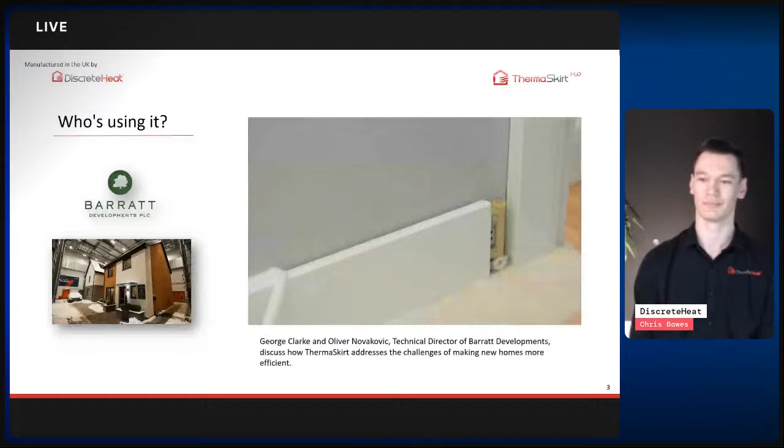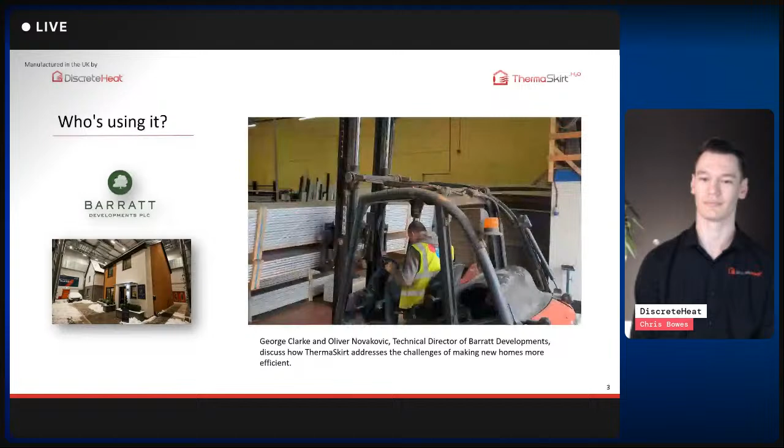So in the Z House I have, because I'm testing. But actually, in some of the other houses we're now trialing, we won't have radiators. We'll either have skirting board heating or underfloor heating. So multifunctional skirting board. Yeah. Love that. And what's great about it is that you can also put electric down it. So as you know, as we move further along the zero carbon agenda, we're going to really concentrate on fabric. So the skirting board's a bit like ductwork for running services. Yeah. So as you know, in offices, we've regularly ran electrics down the service. Here, we're running hot water in the skirting board.

There's some great stories. So, as Oliver mentioned, we are going to have to look at being more efficient with our heating systems. So how Barratt's will do this with their new build properties is they're going to be using heat pumps designed at low flow temperature, as the houses will be heavily insulated. However, you can be very efficient with your heating system too on a gas boiler.

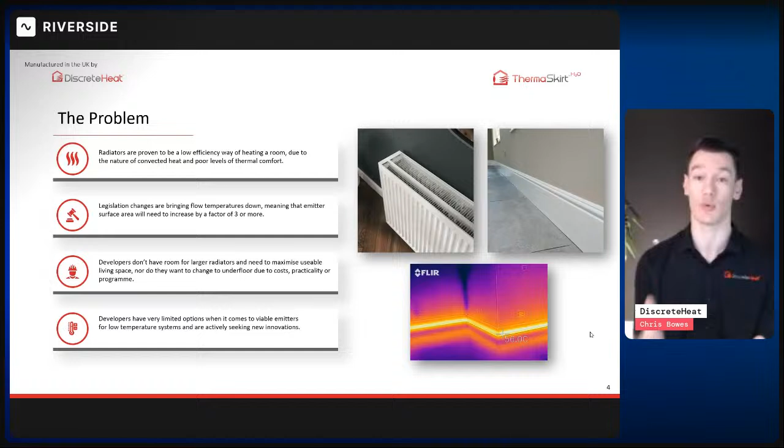What you will have to do is obviously reduce your flow temperature to around 60, 55 degrees. Now, with this reduction in flow temperature, you are going to have to increase the size of your emitters. So with radiators, you will be looking at using either double or triple panel radiators in order to be more efficient. Alternatively, increasing massively the width of the radiator itself.

Now, developers and our 80,000 customers over the last 15 years really found radiators repulsive and not really suitable for their property. So that's why they continue to use us and offer options on developments, and customers continue to come back to us for a more practical, space-saving, efficient heating.

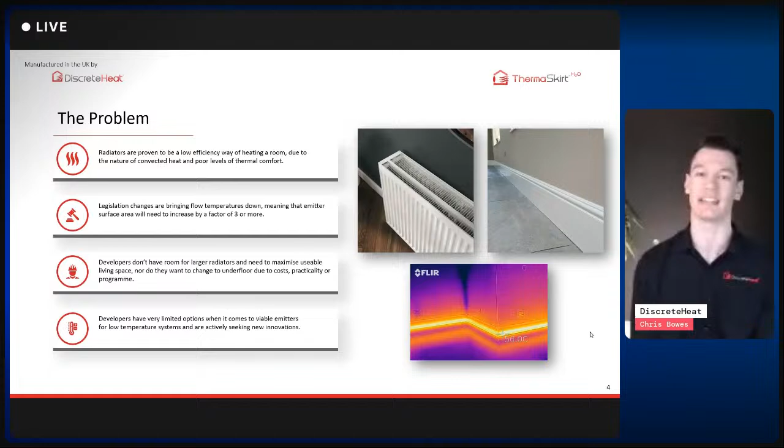Now, to really picture the size of the radiator versus the equivalent length of skirting, I've got a table here that shows you a double panel radiator, the output at delta T20, which is a heat pump flow temperature, and then the equivalent length of Deco BM2, or 2-pipe system, and the equivalent length of Deco BM3, or 3-pipe system. And as it's taller and has more surface area, the 3-pipe delivers more heat into the room.

Now, if you had a room that was around 500 watts heat loss, and you tried to heat it with a radiator on a heat pump, you would need a double panel 1 meter long radiator to meet the heat loads of that particular room. Alternatively, if you were using the 2-pipe profile, you would only need 11.7 meters of available wall space. And with the 3-pipe, you would only need 7.5 meters of available wall space, so even less.

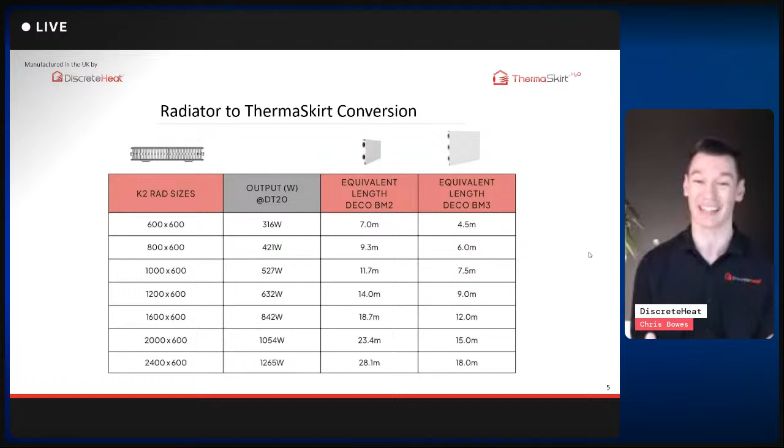So essentially, ThermaSkirt eliminates the aesthetic and practical compromises involved with radiators, as you're removing the need for a big bulky metal box on your wall, and you just use the skirting that you've already got, but that will be delivering the heat.

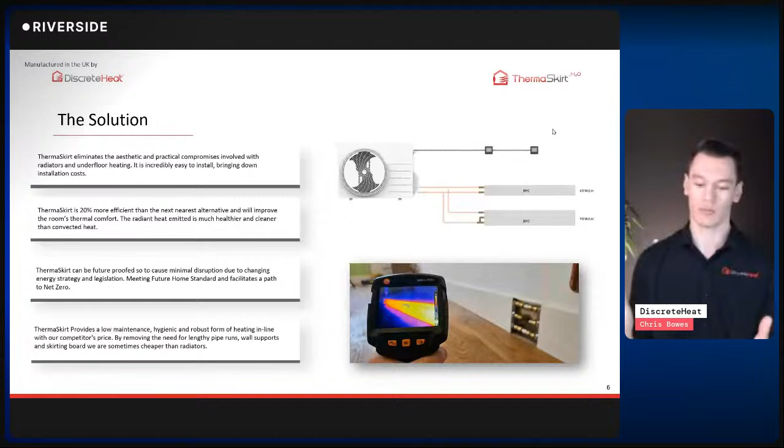Now, really how you should be using your boiler, if you've got one, is by reducing it to condensing temperature, as that's how they're really rated. What our customers have been doing is designing at those lower temperatures, 50, 55 degrees, and they've been finding that ThermaSkirt is around 20% more efficient than the nearest alternative and improves the room's thermal comfort.

Some of our customers have been taking it one step further and actually getting heat pump ready and designing at 45 degrees flow temperature on a boiler. This means they can remove their radiators, get the pipework ready, install their ThermaSkirt, and whenever they're ready to remove their boiler and switch the heat pump in, they can do so whenever they please. So it's a lot less disruption getting heat pump ready using ThermaSkirt, and a great interim solution.

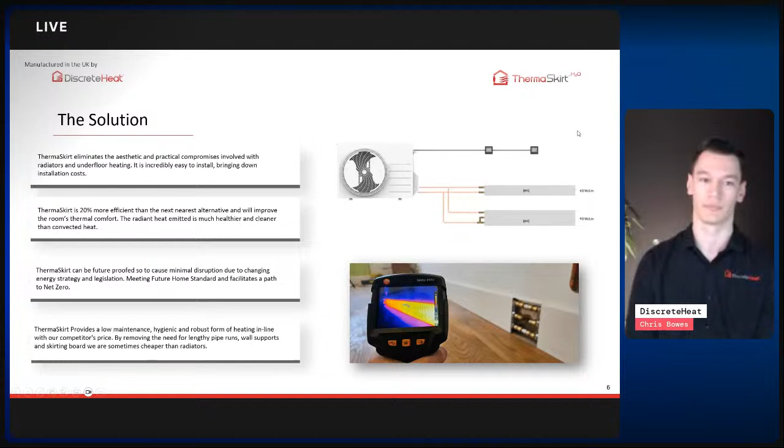So how does ThermaSkirt actually work? We've got here a cylinder that's powered by a heat pump with the 22mm flow and return going around the house. Then we're teeing off into 15mm copper or plastic into the ThermaSkirt, similar to what you would do for a radiator. The hot water is going into the ThermaSkirt, and the heat is being transmitted into the room via radiant heat. You can control ThermaSkirt either by a manual dial like a TRV but at skirting level, or you can use digital controls similar to underfloor heating, like a manifold system.

Not only have you got the flexibility with controls, but you can design all the way from 35 degrees up to 70. That's flow temperature, so it's the perfect partner for heat pumps. You can use it on a boiler, you can use it at really low flow temperatures, and it's a great interim solution if you are looking to be more efficient.

The reason why ThermaSkirt is more efficient is due to the fact it's made of aluminium. Aluminium is a great emitter of heat. It's quick to heat up and quick to cool down. And as it's squashed and stretched all around the room, it's essentially one giant 360-degree radiator.

Now, as it's radiant heat, rather than convection heat like a radiator heats the room, you have comfort similar to underfloor heating. So you've got all the ease of install of a radiator and the fast responsiveness, but you have the nice even heat distribution all around the room, similar to what you would get with underfloor.

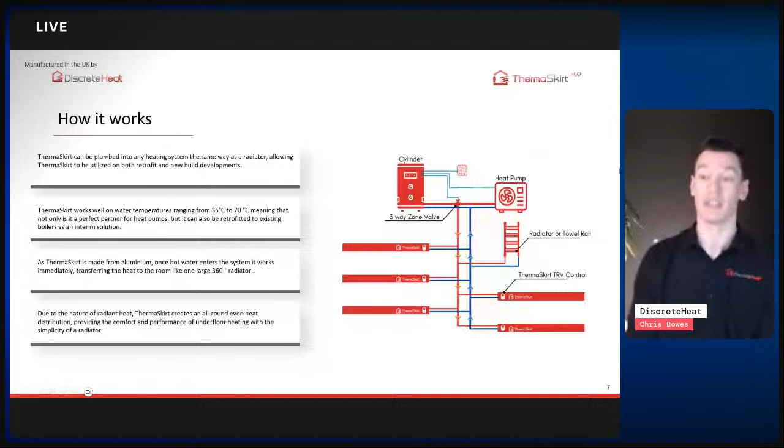So this has been proven by an independent company called BSRIA. So they had a test with 2 rooms, 4 by 4 meters, as you can see on the screen here. Now, to the left, you've got 800 watts delivered by convected heat by the radiators. And then to the right, you've got 800 watts delivered by radiant heat, which was with ThermaSkirt.

Now, if we look at the radiator graph, we've got 22 degrees by the radiator itself. And as you move further and further away from, obviously, the hottest point of the room to the coldest, you're looking at a differential of 4.8 degrees, which is quite substantial considering you can probably detect that quite easily and be quite cold on the extremities of the room. Now, with ThermaSkirt, you only have a differential of between 1.8 degrees and 1.9, which obviously is significantly more comfortable.

Now, from this test data, not only did BSRIA find that we are 13% more efficient than radiators like for like, but you will be more comfortable in the room due to the fact that it will be the same temperature throughout. Now, radiators have to work extra hard on heat pumps or increase by a factor of around 3 in order to meet the heat loads at low flow temperatures, which is quite unappealing and creates a barrier for our step to net zero with our heating systems.

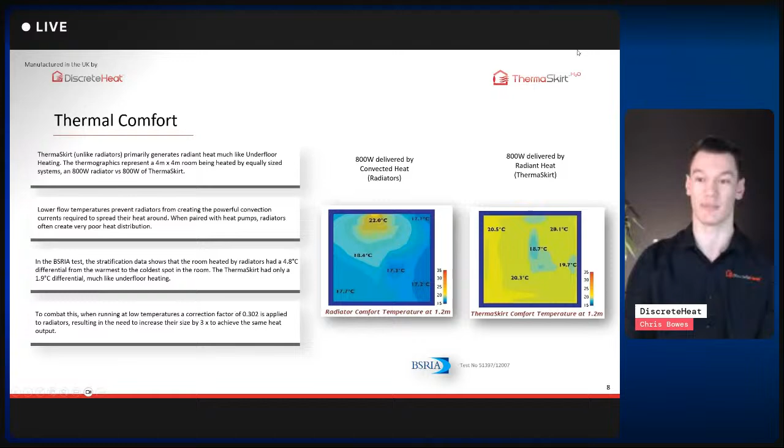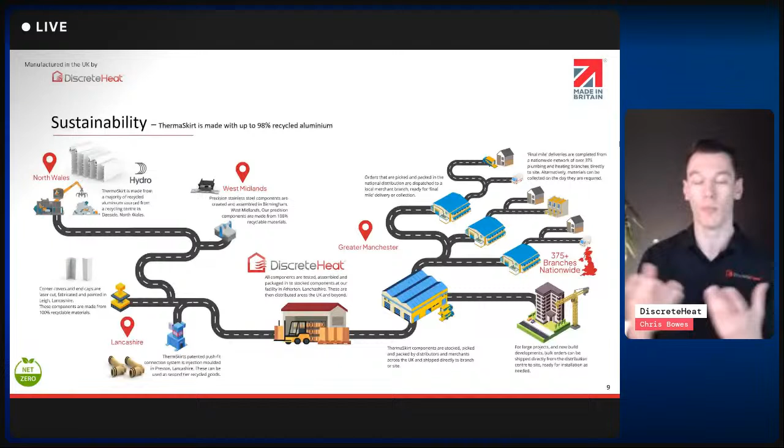So not only are we thinking about being an efficient heating system, but we reflect as a company on how we're going to be sustainable. So this might mean a lot to yourselves, and we all need to think of how we can go more green as a company.

So this is a graph of how ThermaSkirt goes from just pure aluminium to installed at the end in someone's home working as a heating system. So it starts off with a company called Hydro in North Wales. They extrude the aluminium and get it all ready with 98% recycled aluminium and send it over to our factory here in Atherton. Now we get other parts from the West Midlands, Lancashire, covers, corners, connections, which we all assemble, box up, test and get all ready to go.

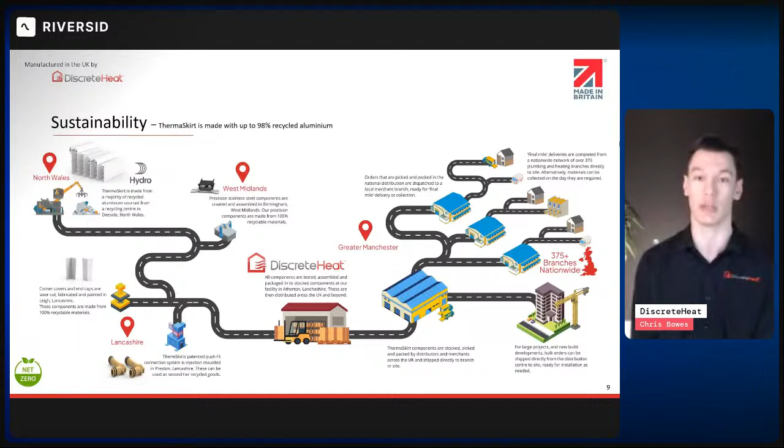Now they get sent to merchants such as City Plumbing, who then send it onto smaller branches onto the homeowner, or they will send it directly to site if it's a large project, like a large block of apartments. One thing to also note is that all of our parts that we get in Discrete Heat are 100% manufactured within the UK. So we are trying to think of the future and our steps towards getting to net zero as a company.

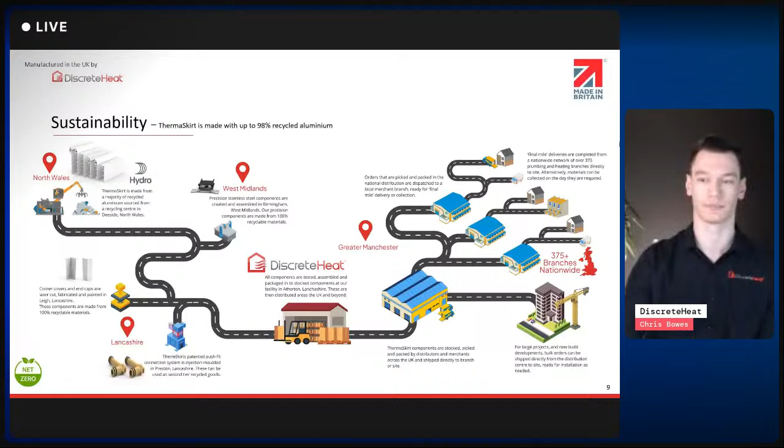Obviously ThermaSkirt is very efficient, it works well. We have lots of people that use us, but what are some real life examples? And this is a great one. So this was a gentleman named Nigel. He had a 17th century cottage powered by an oil boiler. So he was really struggling with radiators as he had high heat losses, very glazed and high heat loss areas.

So radiators would have to be absolutely everywhere. It looked like a radiator warehouse, and underfloor heating would have been very tricky to install with lifting the flooring and the retrofit program. So he found ThermaSkirt and was very impressed. So essentially how we designed it was the 3-pipe for the ground floor, so high heat loss areas where you're spending most of your time, and the 2-pipe on the first floor, with bedrooms that have less heat demand. All of these rooms were plumbed back to a manifold with individual room thermostats that were Wi-Fi enabled.

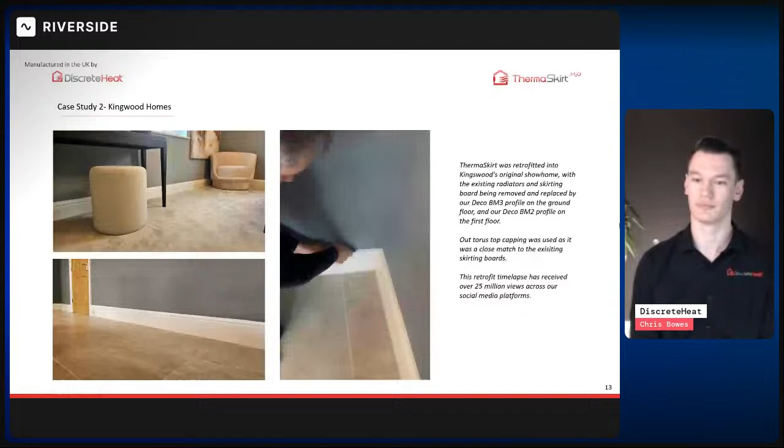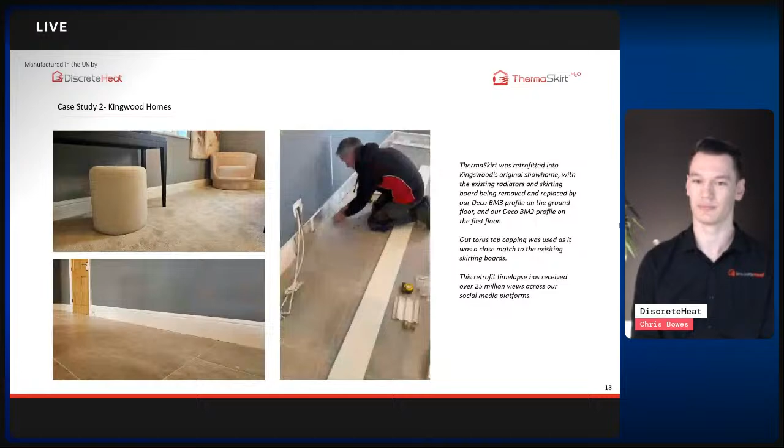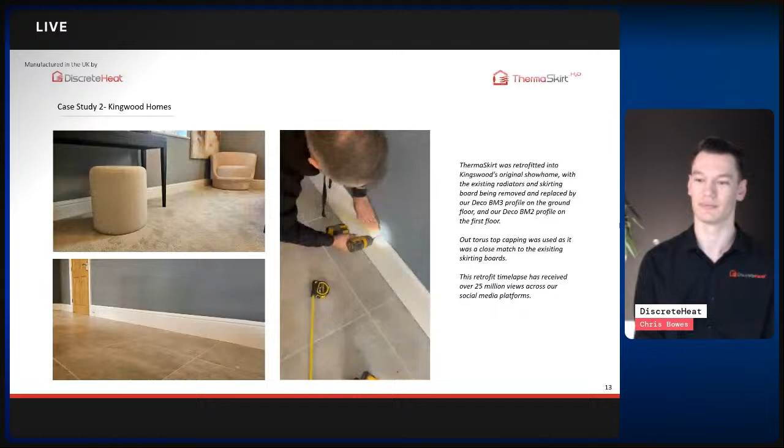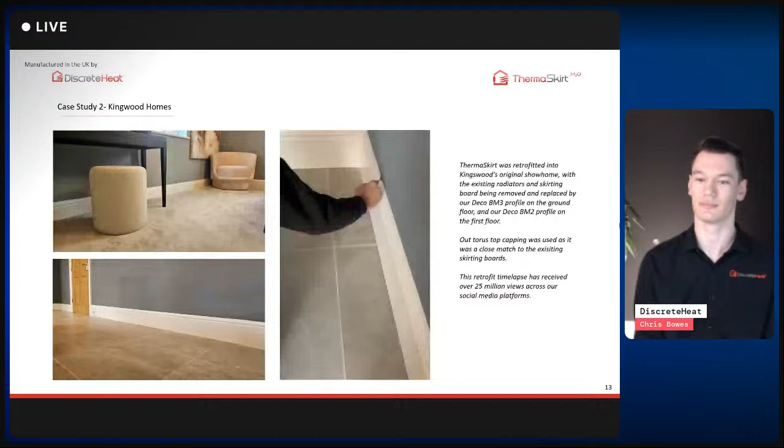Just removing the old skirting here. Getting the pipe ready for ThermaSkirt. This was a bi-directional piece which started in the middle of a wall. As you can see, feeding into the ThermaSkirt there. I'll redo that one. Just as simple as that.

So that particular video had over 25 million views over our social media platforms. It's very popular and goes to show how easy ThermaSkirt is to install. So again, another great example, and if you are in the area where the Kingswood Homes showroom is, feel free to see it, especially if you're thinking about a Kingswood Home yourself.

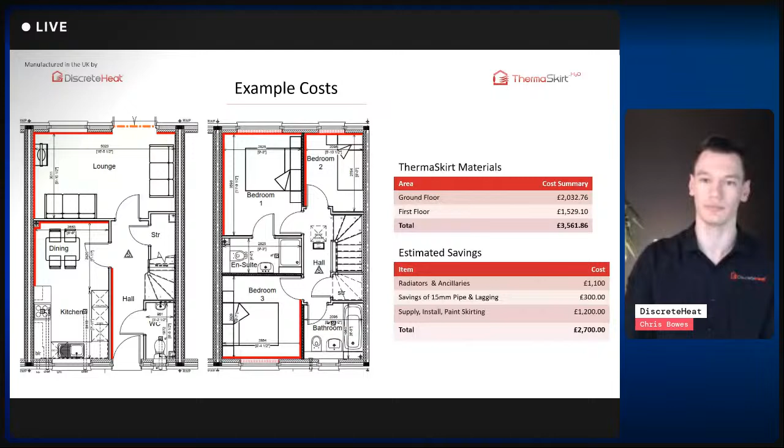So just to summarize this webinar, so you can take your thoughts away from it, ThermaSkirt is a space-saving and aesthetically preferable alternative to radiators. I think we all can agree with that, especially with the pictures you see from Kingswood. You can remove that box off the wall and have a lovely skirting all around.

ThermaSkirt works with a range of temperatures, all the way from heat pump, 35 degrees flow temperature, all the way up to oil boiler, 70, 75 degrees. It works absolutely fine, so it's a perfect partner for heat pumps. Now it comes with a 10-year warranty, and as it's double powder coated and made of aluminium, it's a very robust system, so it can take knocks and hits.